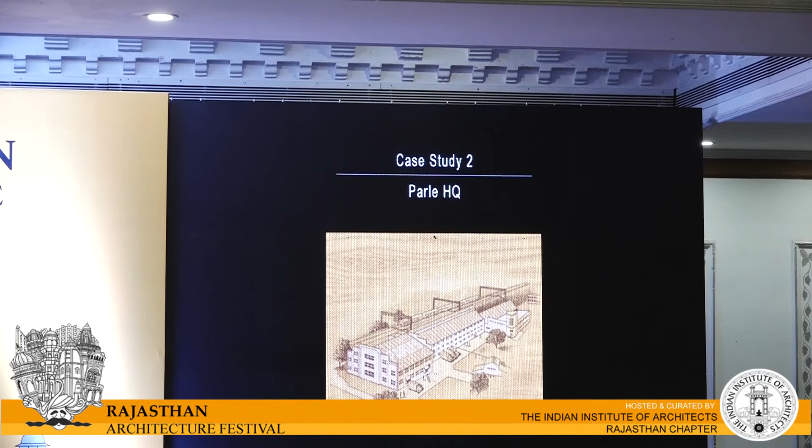The other one was for Parle, the biscuits people. It's an old factory. This is a 1940s drawing of their factory, which is parallel to the railway tracks. They don't manufacture any of the biscuits in Bombay anymore.

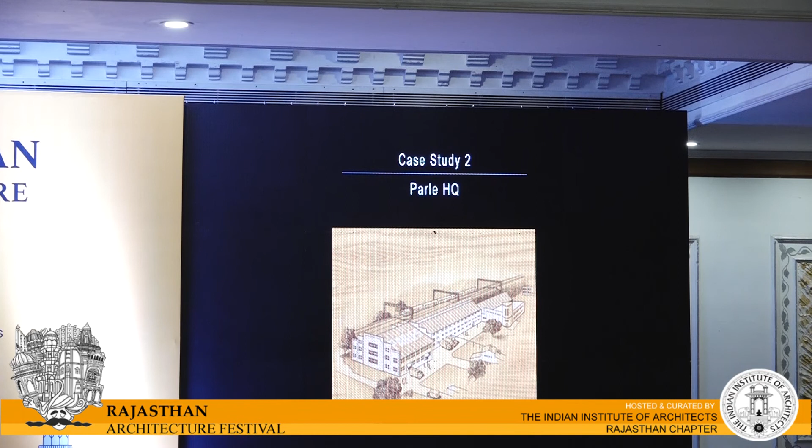They're everywhere else in the country. So luckily they did not want to break their sheds and modernize their campus. So we actually used the old shed, which was almost 85 years old, and converted that into what is now the Parle headquarters.

So there were very intricate changes being made, and they transformed the whole thing into something completely contemporary, but allowing the inside to still be recognized as the old factory. In fact, keeping some of the boiler room spaces and their chimney spaces, and repurposing them.

They are going to celebrate 100 years at the end of this decade. So this is something that we actually built, this whole wall for them. So this was just very quickly.

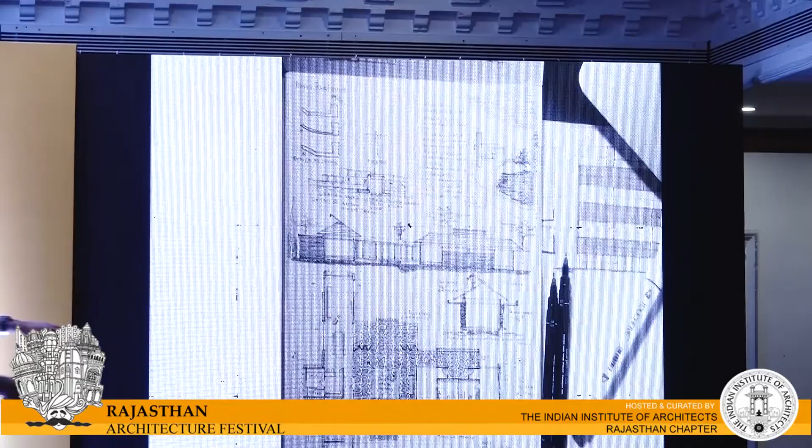So for us, a good life is about living close to the ground and aspiring for the limitless. So I like this idea where it's a single-story house. Let's go back to the sketch. Predominantly, it's a single-story house where this is one wing with one bedroom, and that's another two-bedroom component connected to the courtyard.

The family is very open, they like people coming in, so they have neighbors who constantly visit and engage in conversations. So I'm going to show you a video of how it transforms their life from city life to when they shift into this house. This is a common courtyard connecting the wings. It's around 2,000 square feet, with pets and animals. And the lady of the house knows 4 languages.

And this is about adaptive reuse. This is a project we're working on. It's an old church in the UK which is getting converted into a fine dining restaurant. Okay, so that's another approach. Then it comes to the transformation of material. I'm not sure if I'm going a little too fast.

So transformation of materials, this is directly 3D printing. Now 3D printing, I believe Singapore and even UAE has a target of 25% of the buildings to be 3D printed by 2030, if I'm not mistaken, which is a massive initiative. There's another structure down there, and it would completely revolutionize the concept of social housing.

Today, most of the social housing is a stereotype fixed plan, but with this 3D printing, the complete way you approach a drawing, the complete way you experience drawing, everything is going to change. So that's our architecture, and we are working on a couple of projects. The issue with 3D printing is there are still no uniform codes or standards, unlike a regular brick and mortar wall, so the specification part is a bit challenging. So we have to work with the university who validate the performance of the building.

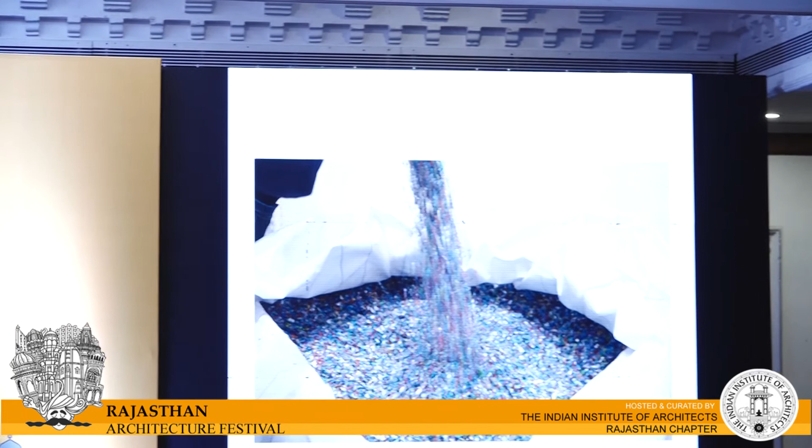And this one, it's a structure obviously not done by us. If I remember, it was in Amsterdam, which is completely made out of recycled plastic. At one of the shows, some rock concert, they took the waste plastic glasses, recycled them into small pellets right there at the spot, and built furniture. So this is completely going to revolutionize the way we work. And I'm not talking of the future, I'm talking of the present, what's happening.

So this is the last one, which actually is a little scary: the strengthening of the metaverse, that's a virtual world. Zaha Hadid, Schumacher is heading this in a very, very big manner. I'm not getting into the other aspects of it. Oh, that's the last one. Okay, fine. So this is what Zaha Hadid has done in a virtual space.

And with this, I'm going to conclude my presentation with a video. It is about slowness. They're all in a rush. Often when young architects come to our house, you're always in a rush to do things, and you just cannot rush. And I think this is a good example of slow living.

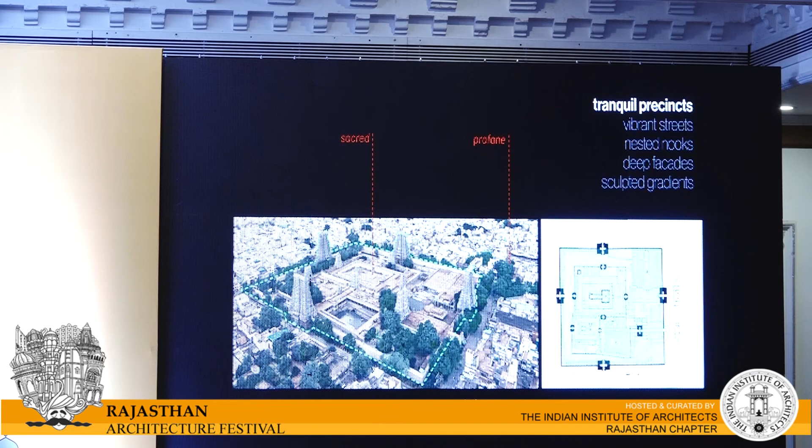It's a sacred precinct, and what one is doing is this separation between what is sacred and what is profane. And by creating this strong identity, which is a combination of the architecture as well as how it is enclosed, you escape from the hustle and bustle of the city, and if you move through these concentric layers, you come towards something which is more enigmatic, peaceful, and spiritual.

But there are also other kinds of examples, like in Rajasthan itself, you have these little settlements towards the Barmer side, which I saw when I was traveling once, the Dhanis, these little clusters of houses which huddle together and create an enclosure, a walled enclosure.

Now in this case, it's providing security, so there is that secure enclosure where people can live and sleep at night, but it's also creating a microclimate. By creating this little huddle, you protect from the hot winds, and you have planting within that creates an oasis. So it's again creating a precinct, a space within a harsher climate, an oasis within.

So we're working on a project in Sirohi in Rajasthan, a school, and some of these thoughts were in the back of our mind. We were looking at how you create a cluster of buildings on a 4-acre site. Typically when you do an institutional project, you deal with the edge of the property. How do you make it disappear? Because there's something very banal about this compound wall which everybody wants. And then there are all these utility elements, roads, parking, utility structures, which come as part of any campus plan.

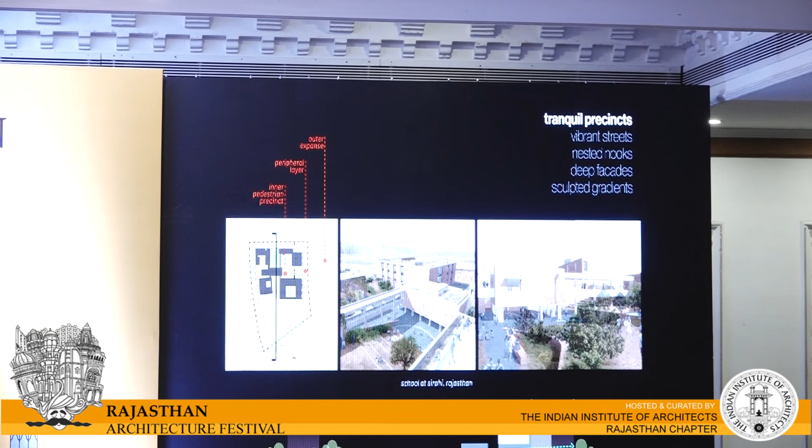So what we did was create this precinct within a precinct. That pink layer which you see is a peripheral layer within which there is an inner precinct which is pedestrian. And as you can see in that section, when you enter the inner precinct, it's like a bowl, and as your eye level goes lower, that peripheral layer disappears, and what you're connecting with is actually the landscape beyond, the agricultural landscape and the hills in the distance.

So this is an example of an idea taken from something quite different, the examples which I showed you earlier, but applied in a very specific, very practical solution for a master plan. And what this does is that when you remove elements like roads and parking from the inner sanctum of the campus, what you see is the architecture and then the landscape, and that connection creates a strong sense of place. Hopefully.

Then of course, we've all been fascinated by streets, especially the experience of a street in an old, traditional city like Ahmedabad. We have so many examples in Rajasthan, Jaisalmer, and when you have that kind of experience, it stays within you and becomes part of your system. And there's a loss of that kind of experience in our cities today because of the building typology and the bylaws that we follow.

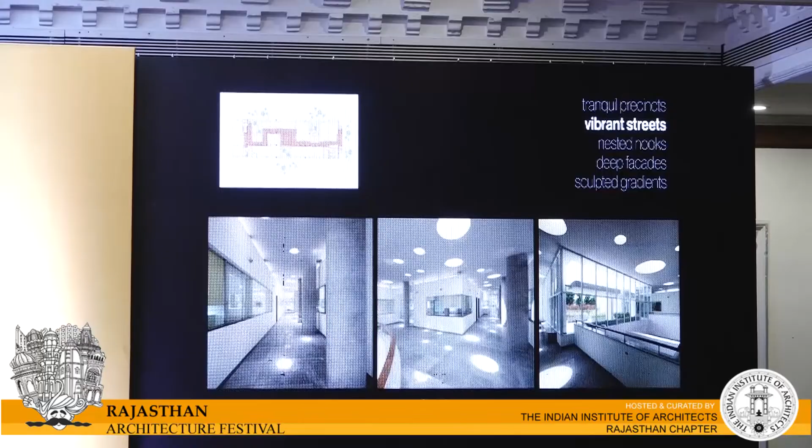So the street winds through and becomes an interactive space between these incubation labs and the students with the classrooms. And then again, there are these terraces that you come across, which lead out, and as you move through the street, you get glimpses of the landscape, which connects to what's beyond.

Then, of course, this idea of scales within scales. You have this idea of a shrine within a shrine, and again from Hawa Mahal, these beautiful multiple scales within a building. You have the larger scale of the palace, but you have a smaller scale of these little alcoves, little pavilions, which is a wonderful play. And a modern example from the Millowners' building in Ahmedabad.

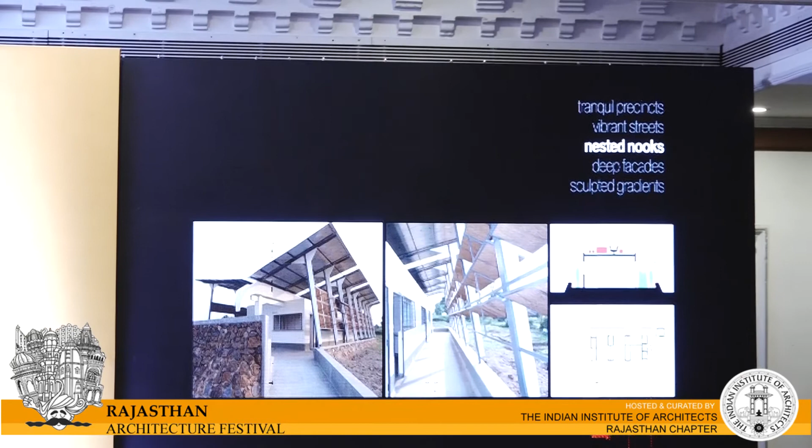So this idea of a building within a building was explored in this healthcare center which we did in Dharmapuri. It's a climatic solution. It was a very hot climate and you create this shaded layer around the building. But programmatically, the inner building is placed asymmetrically, and you get a variety of verandas, waiting spaces for patients, public gallery space, the back corridors for doctors, and the service area, and the cavity at the top is used to run services.

Again, when you work with bylaws, you get stuck with certain dimensions, like a 10 feet floor dimension, and staircase widths, which are determined by fire norms. So how do you escape from that? If you see, D is the standard dimension, but you use larger than and smaller than dimensions. So you break these scales down so that your eye always comes to things which are smaller than that standard and also larger. It's a way of moving away from that standardized experience.

And there is an extension to a house where there is a perforated box which allows nature to come in. But within that, there is a smaller box which has multiple alcoves and rooms and screens which open and close to allow differences in light, privacy, etc.

And then, of course, the idea of facades themselves. I'll just go through this quickly. So again, a fantastic example from the Hawa Mahal. And this idea of the veranda, which becomes a climatic element, is also a social space.

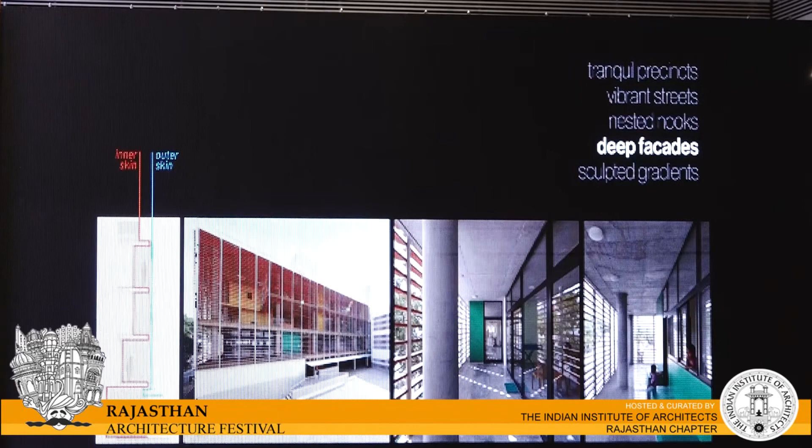And we've used the idea of a veranda in a multi-story building where you have this outer skin, which is of these metal louvers, and an inner facade. So it's basically a double skin facade which has varying depths, which allows sometimes only weather protection, but also becomes movement spaces and social spaces.

And of course, another example here of these kinds of facades, compressed double layer facades with many kinds of roles like security, climate protection, privacy, etc.

And then last, I'll just take 30 seconds on this. It's this idea of settlements in a monsoon landscape, and this idea of raised mounds, Janapada, where the people set foot literally, and which accommodate these varying levels of water during the monsoons. So this is actually close to Patna. And then of course, as a counter to the high mounds, you also have the pits, ponds, the agricultural tanks, and the sort of ponds which you see in Rajasthan also.

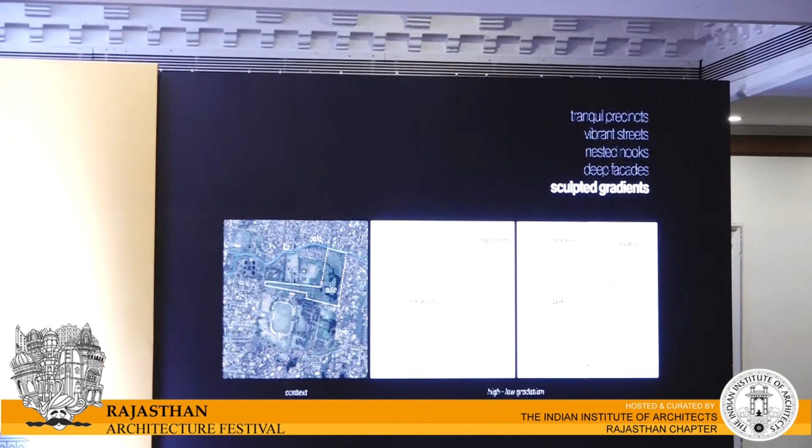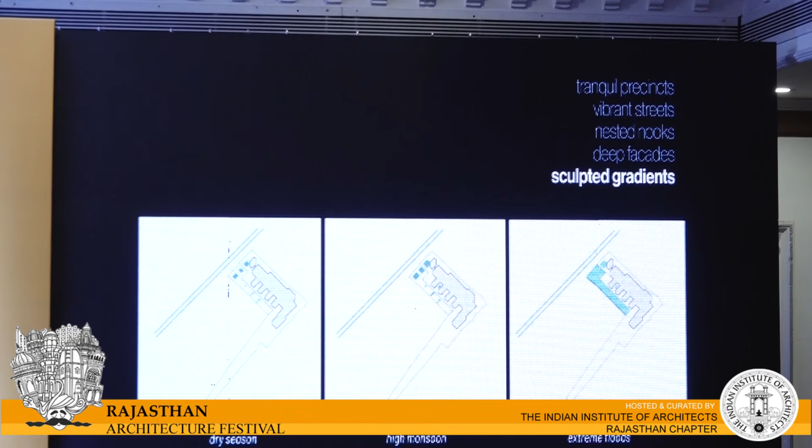But we were doing a museum project there in Patna in a waterlogged area. So it's basically divided into a high ground and low ground, with the building on the high ground and a park in the low ground. And what the park does is it actually accommodates varying levels of water. So in the dry season, it's one level where we see ponds, but the water level can rise.

And in an extreme flood like you had in 2019, you would still have the building and the entire park would be flooded. So this is a flood mitigation strategy, urban flood mitigation, but which again comes from this idea of a traditional practice.

And then of course the landscape itself is developed along wet-dry gradients, and so this whole thing about cultivation along those gradients. This drawing is by Anuradha Mathur. It's very unfortunate that she passed away, but she actually worked on this collaborative project. And so this is an example of how one occupies a monsoonal terrain. So these are a couple of examples.

But I just want to touch upon one point: it's not necessarily a linear process where you have an inspiration or a reference and you move forward. It's actually sometimes the other way also. Sometimes you do something without thinking, but you find resonance in examples elsewhere.

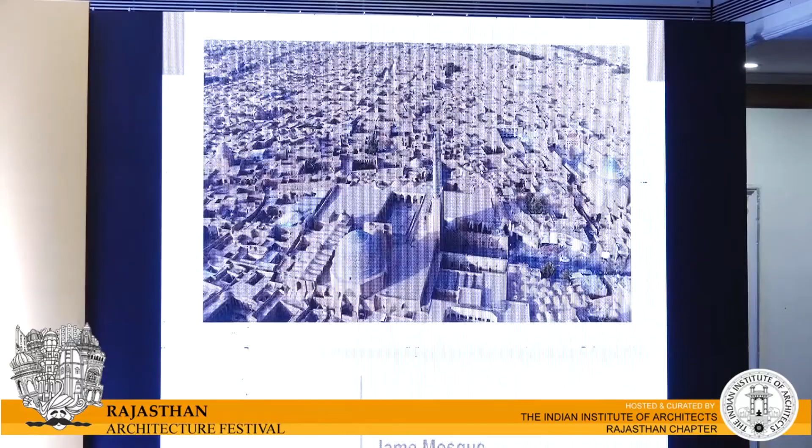That is the main center, what we call the Fahadan. That is the district; that's an aerial view of it. This city was built with all sun-dried mud bricks, and since we get a lot of sandstorms, most of these houses do not have any windows opening outside.

The other thing about the houses is they are all built with about 24 inches to 30 inches of walls, so they can contain the heat when it's winter, because the desert climate is very cold, so the mud bricks contain the heat. So this is some of the houses that you see. There's a courtyard in the center, and we have the wind catchers, and that's how you get the cool air. That was the air conditioning system. I'll just show you later.

This is one of the main city centers, and it's been maintained since then. This is one of the Zoroastrian temples from way back. So there are some of these big domes which have been done and they still are there. And there are all these light wells, so they bring light into the house and into the buildings.

This is a typical wind catcher, and that brings the air, and there's a very nice system. It doesn't allow the sand to come into the house, but it gets the wind and it goes over a bed of water, and then it comes into the house, so you get a very nice environment. That was the old air conditioning system.

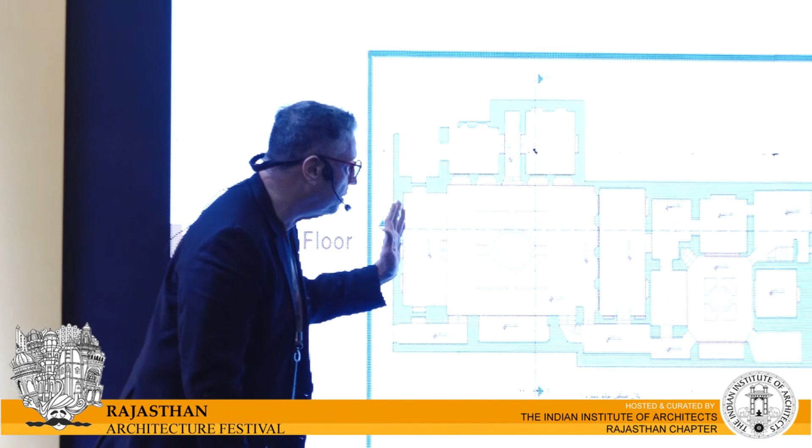So I'm going to just take a project which was converted from a single family home into a boutique hotel. So if you look at it, that's the entrance of the house. All the houses had a courtyard, and this is a winter house, and that's the summer house. So when the sun moves, in winter you use certain rooms where you get sunlight into the room, because there was no air conditioning, there were no heaters. So these were the heaters, and it was planned so that the room temperature is maintained and the sun comes into that room.

And you see the walls, they are 2 feet, 3 feet, depending. And none of the houses had windows. So inward looking. That's underground. Every house had an underground, and the underground was like a cooler. It was like the refrigerator. We used to get water in that time, and we used to put it in the basement. All the seasonal foods were kept in the basement, and they used to remain cool and fresh. So we used to use it in winter.

That's another part of the house, and that's the basement. So there are 2 houses, and this has been taken and converted into a boutique hotel. So when completed, this is the entire property. I must say thanks to my friend who shared all these plans. His name is Said Abbasi. So that's how it looks when it's completed after the restoration.

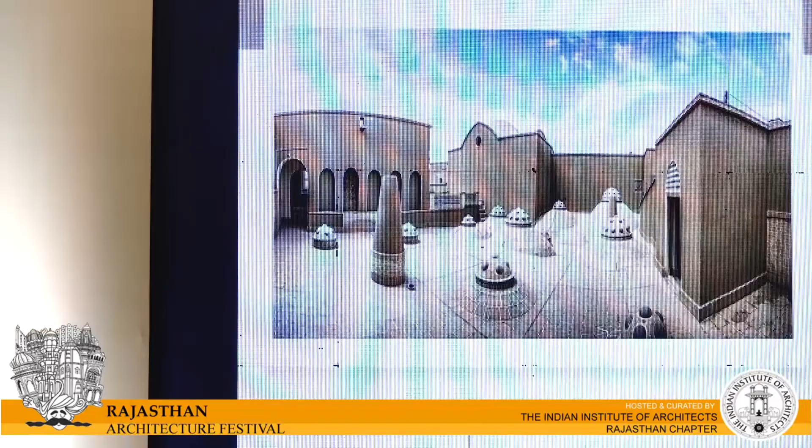That's a good use of the property. So these are the light wells that are there. You can see them from the terrace. You get light into the houses. That's the restaurant after completion, nighttime view. And that's one of the rooms after it's been restored. Restaurants.

So this is the wind catcher, and just explaining to you how it happens. So there's a wind inlet, it comes down, there's a water bed, that's a pool, it goes over the water and then comes into the houses and then is extracted from the outlet dome. So there's full circulation like when we do the stack effect in a lot of buildings today. This was done 4,000 years ago.

That's a carpet store in the boutique hotel. That's a balcony on the room. And that's a Persian night that they have, they sing, they read the Hafez and share these things. There are particular nights when they spend.

That's an alley. So if you look at these alleys also, all these alleys were very narrow. They were mostly covered. They had buttresses supporting each other, so that when the sandstorm used to come, it was protected.

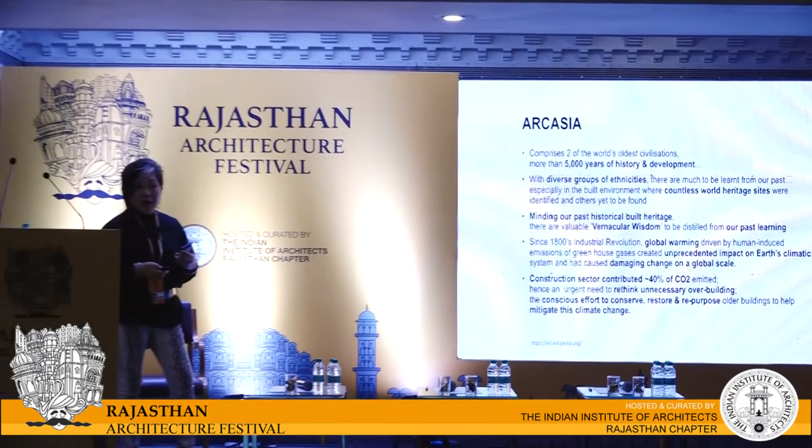And because of global warming, as Salil has mentioned, we are now suffering unprecedented impact of climate change on our global platform. And because we are in the construction industry, we play a very pivotal role in making sure that we do not destroy our planet. Part of the reason why we need to conserve our heritage is so that we don't build unnecessarily.

Yeah, so on that note, just to give you a summary, our World Heritage Sites taken from China, India, North, and Southeast Asia, a very quick snapshot. We have thousands of known projects, but yet there are some unknowns. So the premise for me here is to just try to summarize our major concerns.

I think my colleagues have done a wonderful job on looking at the transformation, but I thought the call for us is to look at our heritage and, if possible, take a very sustainable way of looking at our heritage buildings. They may be built a long time ago, but they can be repurposed. Some of the topics we talk about are repurposing our own heritage and making it meaningful for future use. So that's where I've summarized: minding our past, discerning the present, and preparing for the future. This is our commitment. In view of time, I'm not going to do it.

In Singapore's journey, I just like to highlight that we are a very, very small country. In order for us to do a very good program, there is a need for a framework of policies and guidelines towards conservation, restoration, and the retrofit of heritage buildings and structures. Then you also need the other portion, which is governed and assisted by government agencies to help structure the implementation, and of course recognition of good projects done, and also some special economic incentives to recognize good effort.

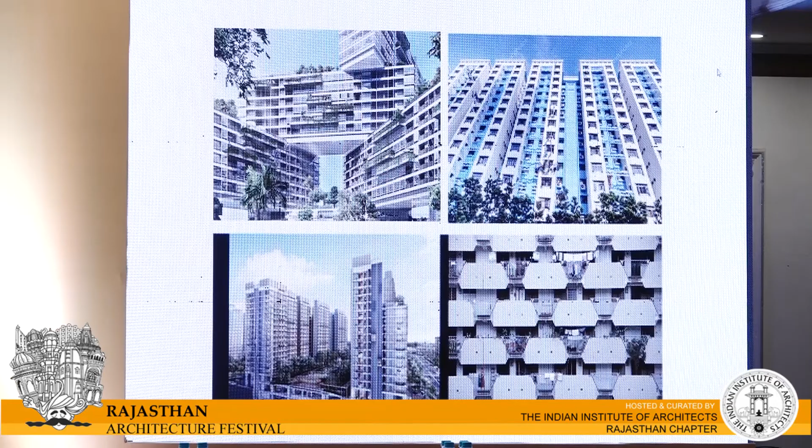But just to share that conservation and restoration of our built heritage goes beyond keeping the facade. It has to keep the inherent spirit of the original architecture. It also requires a deep appreciation and understanding of the buildings that we have, and good management practice. Fundamentally, retention, restoration, and repair, and of course thorough research. We also employ a top-down approach, and every stage of conservation is recorded.